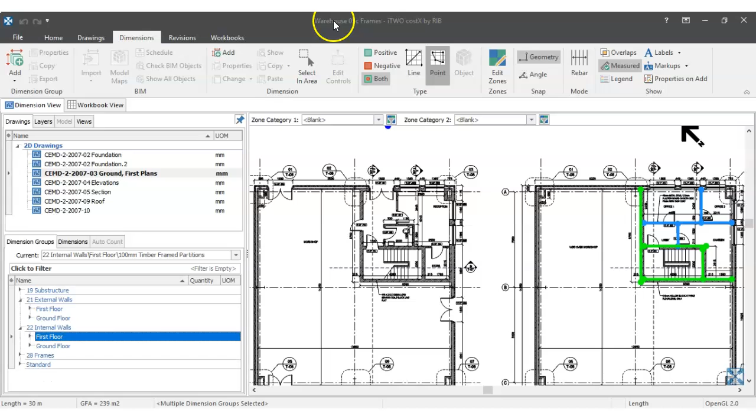Okay guys, welcome back. So starting off where we left off last time around, I will get to renaming this after I finish. I'm going to add a couple of things to my external walls and my internal walls, starting with the ring beam, or there's a beam in the corner here on the internal leaf.

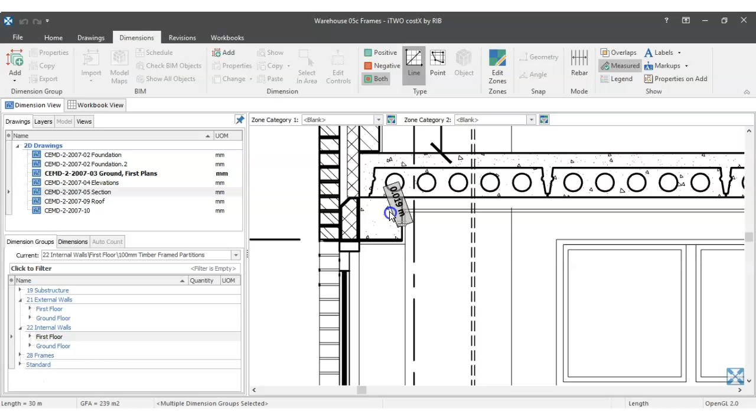So you'll see it in the section if you click section here. You see that beam there, you would have done this with FICRA. That's a 215 high by 215 wide beam on the internal leaf, just above the 215 wall. Same goes on and around the stair core, and then up along the side here, which you'll see in the plans. So those beams have to be measured.

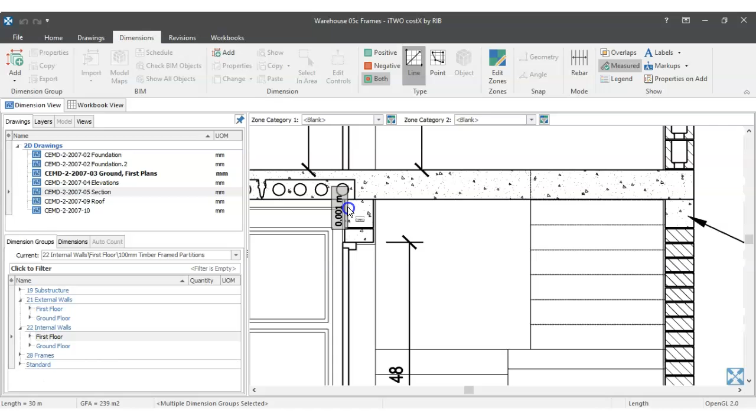What we're going to try and do is measure it in such a way that we measure the length, the volume, the weight of steel, of reinforcement in that beam, and the formwork. Now the formwork, just make a note, if it's a 215 by 215 in situ concrete beam, there'll be formwork on one side, which is the height, the other side, which is the height, and the bottom, which is the width. There will not be formwork on the top, because that's where we're pouring in our concrete. So you would have done this with FICRA.

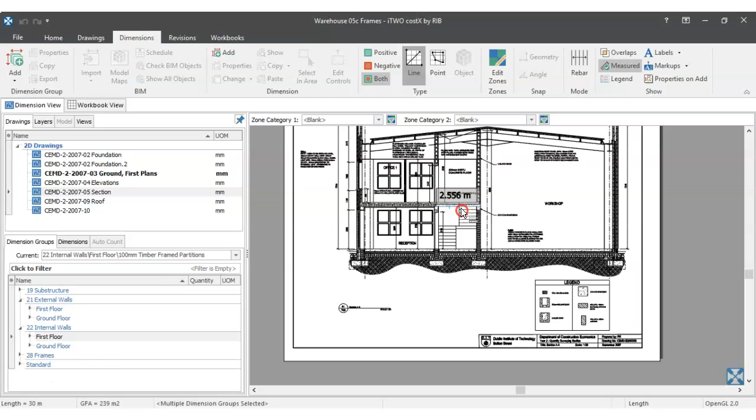So let's start with the external walls, and we can click on the external walls, click on the dimensions tab, click add. I'm not going to designate whether it's on the first floor or the ground floor, so we can just leave that blank, 21 external walls, and then just put in 215 times 215 millimeters in situ concrete beam. Okay, and it's in the external walls.

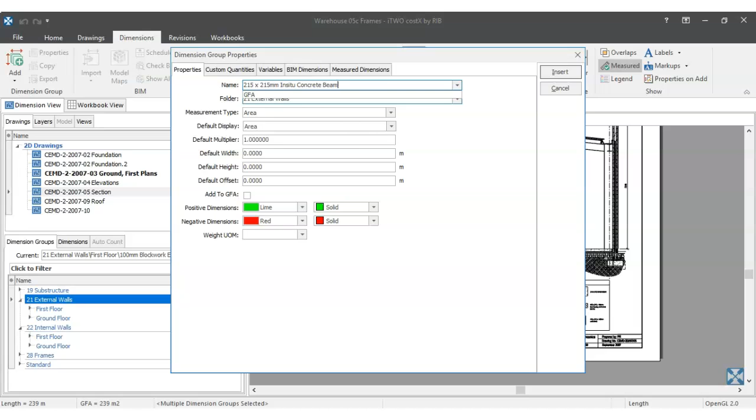I'm going to measure it as a length, and my width is 0.215 and my height is 0.215. The reason it's not 215 is because it's per meter. You can see the little M there. So I've got to convert the 215 millimeters to meters. The weight UOM, I want tons, not kg. Now I could take it in as kg and price it accordingly, but reinforcement steel is usually measured in tons, so let's leave it as tons.

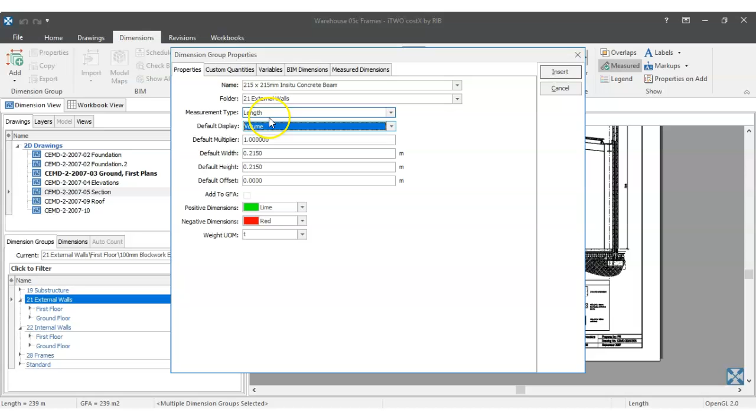I'm going to default display it as a volume, but make a note that I am measuring it as a length. Custom quantities, the next tab, I am going to add a custom quantity, and I have my volume, my weight, I want to add formwork. Now I could do this in the capital F formwork, in the workbook, by taking the length times the 3 sides, but why not put it in here as an automated measurement, meter squared drop down, so formwork meter squared.

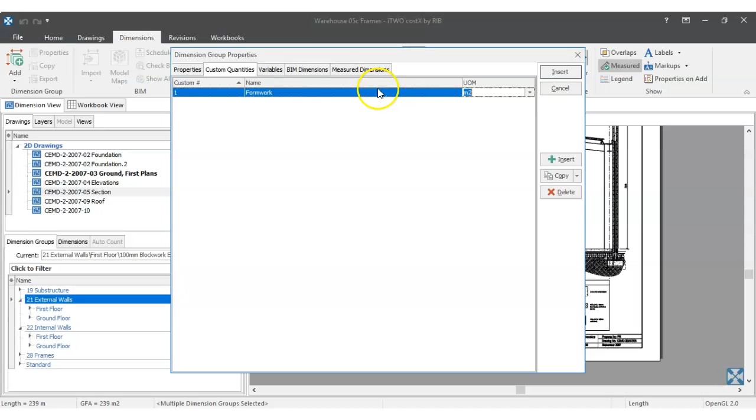Cross now into my measured dimensions, and there's a couple of different items I need to measure here. My volume is in there as the area times the height, and the area, of course, will be the length times the width. So obviously the volume is the length times the width times the height. I am going to measure a length, so that'll populate that. Actually my weight won't be my length. My weight will be my volume times 250.

I'm guessing that it's 250 kg per meter cubed concrete reinforcement. So every 1 meter cubed of concrete, I'm applying 250 kilograms of reinforcement. I don't have a rebar schedule at this stage, so this is just a guesstimate. It might be different than what you did with FICRA, but I can change it if I go back to FICRA's Excel files and see that it's completely different. But for the moment, let's use that rule of thumb for the beam.

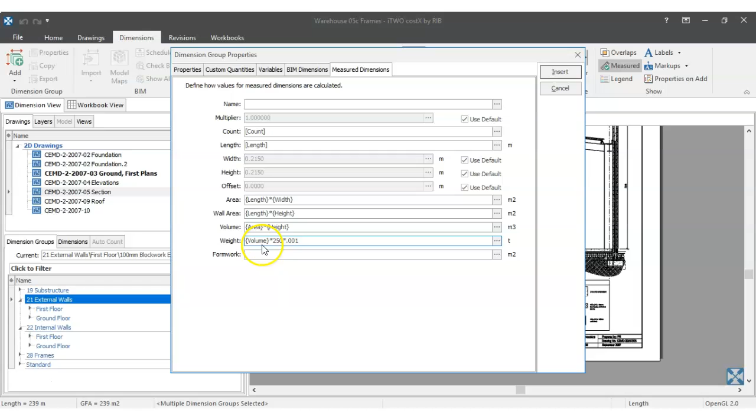Volume times 250. And why am I multiplying by 0.001? Well, that's my reinforcement conversion from kg to tons. I can divide it by 1,000 or multiply it by 0.001. So I'm happy enough with that. Close. So that's that formula, which will take the volume times 250 by 0.001. Now I could have typed that in rather than using these 3 dots, but it's handy to use the dots.

Formwork will be the length, which I calculate, times 3, because you've got 3 sides, times 0.215. Or instead of 215, you could put the width. So we've got length times 3 times 215, or width, which is 215. I might put in 215 because they're different widths and heights.

It's not width as such, it's the width and the height. So the 3 is basically the 3 sides, and what is the height or width of those 3 sides? It's 215, because it's a 215 by 215 in situ concrete beam.

So the length will be the total length multiplied by 3, multiplied by 215, will give me an area. I'm going to close that, and I should be happy enough with that. Click insert. So in that goes.

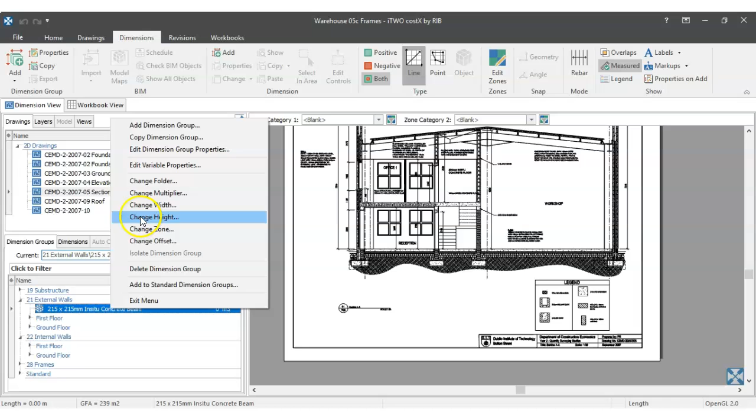Now I'm going to have the same in internal walls, so rather than do it all again, let's try and copy that dimension. Right click. Is there a copy dimension here? I haven't done it in a while. Copy dimension. This time I'm going to drop it down into my internal walls. Is my internal walls there? I might have to just type it in. 22 internal walls. Just get rid of that.

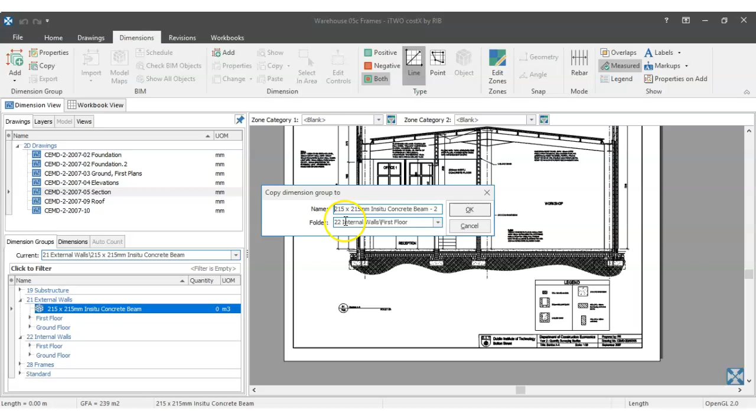Ooh. Oh, it won't let me delete it. It's fine. Leave it in first floor. It's okay, it doesn't really matter. I can change it. I might put a 2 there instead of a copy, and just make sure the name is correct. So I've just basically copied that dimension with all its properties. It's going to go in the first floor, but for some reason it won't let me delete that.

Click OK, and then I can double click into it and I can delete the first floor back to the dash, and everything else is okay. I could even change the color when I go back into it and click update. So there I've got two exact same measurements. By copying it, I didn't have to do the whole thing again with the formwork and the weight and width and the height, etc. It'll have all those properties in there because I've copied it.

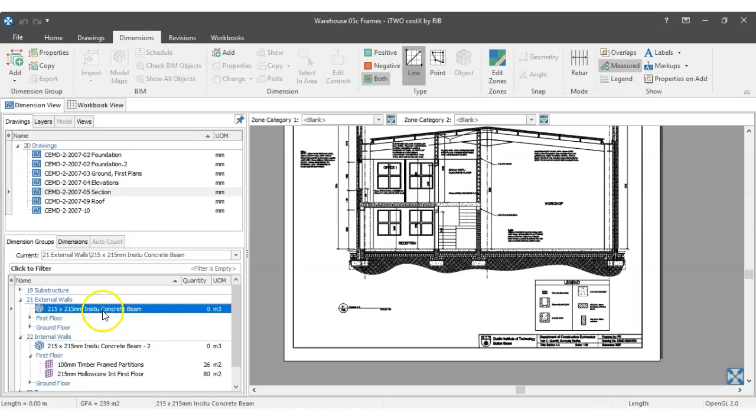So let's go and measure these concrete beams, starting with the ground floor. Measure it as point mode, dimensions. It starts right here because it starts on the 215 wall. And where does the 215 wall start? It starts here in this corner. So I believe it's from there to there. Now the reason I'm not bringing that all the way across is because I'm going to start right here. And if I bring it all the way across and then start again right here, I'm double measuring that corner.

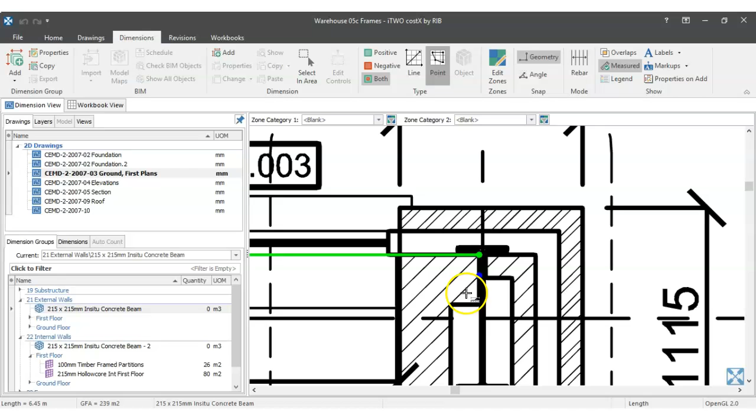Remember, because I'm measuring a line doesn't mean that line is on the edge. That line obviously represents 215 millimeters, so it's bringing it right to there. I could bring it through the middle, but I'm measuring edge to edge, so that's okay. But it does represent the thickness or width of that 215, so I've got to be careful not to over measure things by double measuring corners. This comes with a bit of practice, and you can see there I've measured the other length.

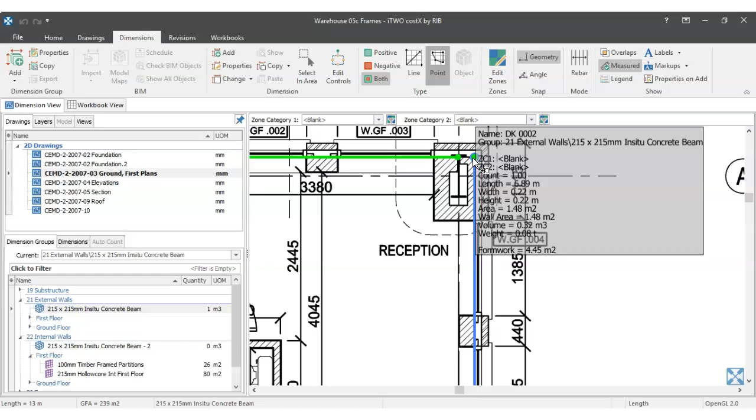Now I've measured through window opes, etc. In fact, that is the case because it's above those windows. And you'll notice I started on that edge. So what have I got there? 1 meter cubed, but you'll see that my volume is 0.62. I've got a formwork of 8.61. If I hover over, I've got a weight of 0.15 tons. So happy enough with that.

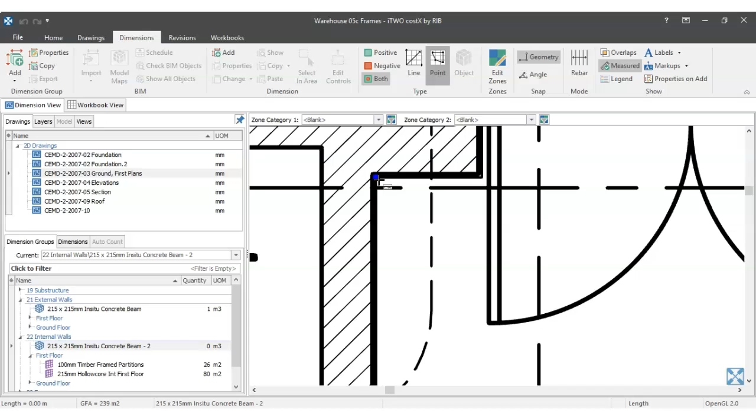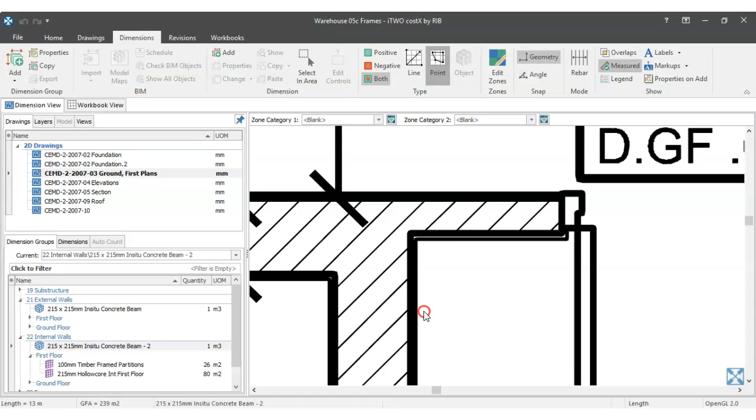Onto the in situ concrete beam. What's going on here? Well, I'm going to start right here at the corner. Why? Because I've measured across there as the external one. I'm going to come down to the edge. I'm going to click from there to there, stop there because I started my external one down here, and then moving on to here, I can go right the way to the top. Zoom in a bit more, and that will cover me up to there, and then start there and end there. So that should be enough there.

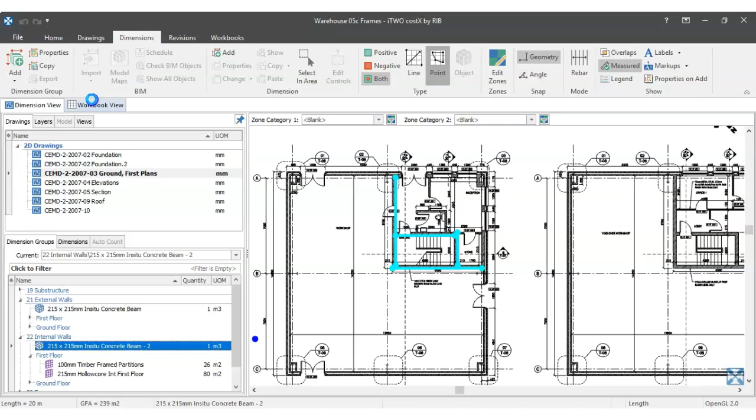Hover over that. I've got a volume of 0.9, a weight of 0.23, a formwork of a little bit more than I had on the previous. Okay, so I'm happy enough with that. That will give me all the dimensions I need to measure that in situ concrete beam in the BOQ. So realistically I only measured the length, but because I got all those attributes in terms of what I put in for width and height, formwork and reinforcement in terms of weight, they're measuring them all as secondary quantities, even though it's only shown as a volume. So you should be getting well used to that by now. CostX does something similar in relation to shapes, and I'm happy enough.

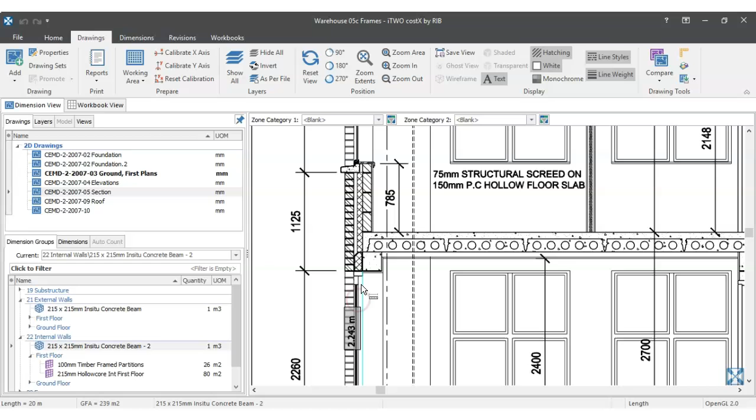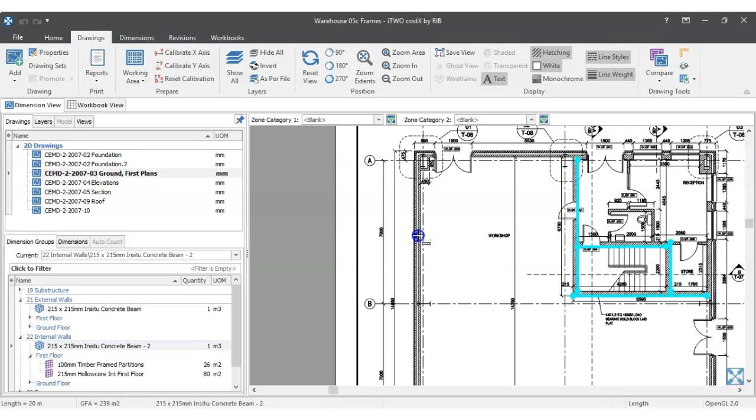The other thing I want to add is the forming cavities. So where are they? When I measured external walls, I measured individual external leaves, individual internal leaves. I didn't measure this forming cavities, which includes the insulation, up through that entire perimeter of my external wall. So in the ground floor, there's my cavity. And through the center line of that cavity, in terms of an area, total area around the building, I've got forming cavities of 100 mil.

So let's put it in. Click on external walls, add a dimension group into the external walls. You can leave it just as external walls because it's going to run the gamut in terms of ground floor and first floor up through both.

And I can just put in forming cavities. Now I can put in a full description, be it wall ties, insulation, etc. But I just need to represent what that is, so I know what I need to use in my workbook. I'm going to measure it as a length, and I'm going to default it as a wall area.

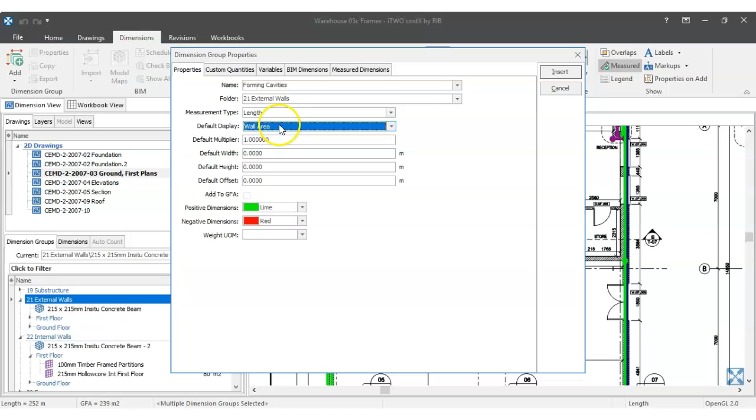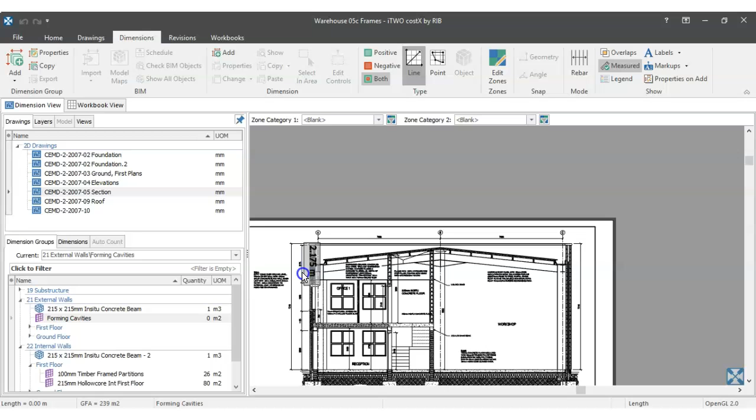Now, if I measure it as a length and want to default display it as a wall area, I need a default height. So what's the total height of my building? Well, I know it's 7.2, so I'm going to put that in, and I might use a different color, dark blue, click insert. So 7.2, I would have checked this before I measured it. That's the height of this dimension, that dimension, those 4 dimensions there.

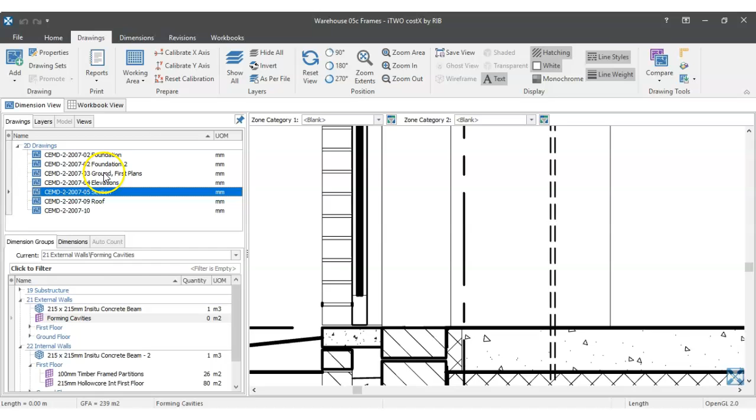Or you can click the little drawings scale ruler here, click, and it's down to my ground floor because anything below that is in the substructure. 7.2, bang on. Okay, so I'm happy enough with that. So I need to go ahead and measure it. Let's click back on my ground floor and make sure I'm on the quant. I am. I measure all these things usually in point mode.

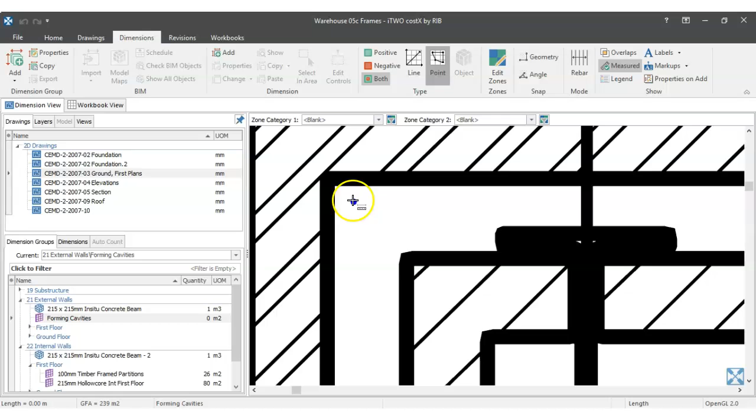This time around, I'm going to turn off my geometry. The geometry basically wants to snap onto a point or a line. I'm going to turn it off, and basically I can click wherever I want. I'm going to click on the middle of the first corner. Now after I've clicked it, I'm going to hold down control. This is important. Hold down control on my keyboard and keep holding it.

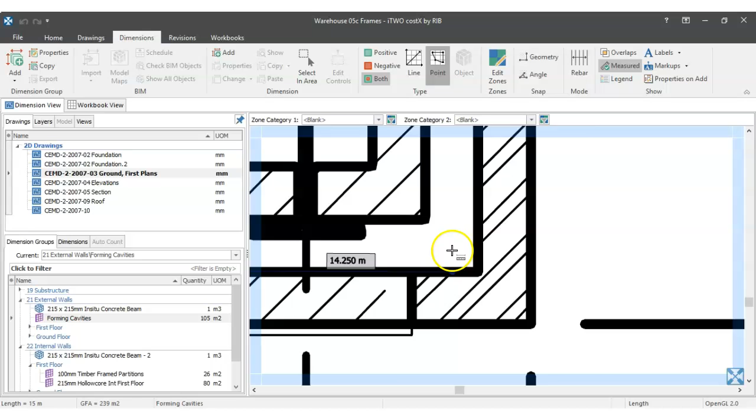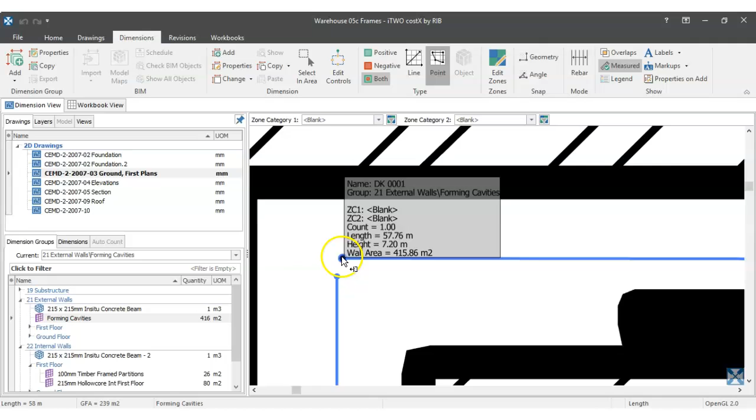And then go to my next corner. Okay, there it is. And then go to my next corner, what I think is the middle. Click. And then up to my second last one. And then across to click and release. Oh, that's jumped. Push back. There we go. So total length is, if I hover over it, 57.76.

Total wall area, because it's a continuous line. Now I could have measured them all as 4 separate lines. Click, click. Move on to the next one. Click, click, click. But I measured it as a continuous line by holding down control as I click around, and then click on the last one, release the control, and that's a continuous line.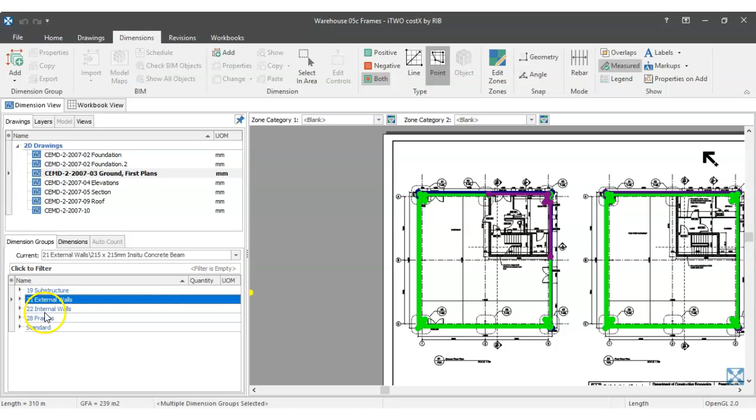To see your continuous line, click your dimensions, there it is. If you measure them as 4 lines, you have 4 individual measurements there. So the total area of my forming cavities is 416. So that is those few extra things in external walls and internal walls: my internal beams, and forming cavities, which is my insulation and wall ties. So I'm going to move on now to 32 external wall completions.

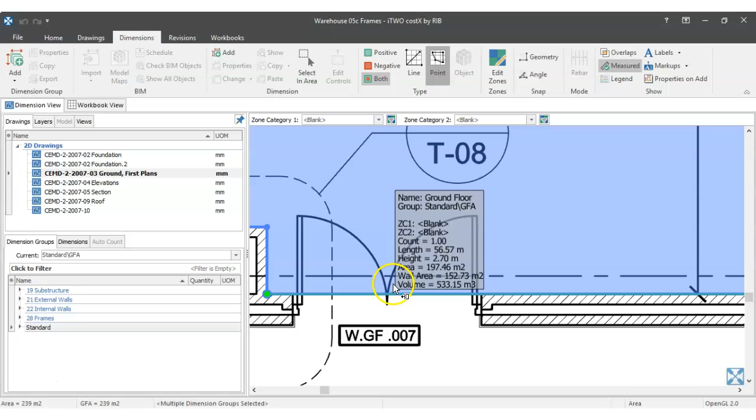Okay, looking at the windows, let's take a look at them on both the plans and elevations. There at least is the door, 1.8 wide. That's a steel door. There's also a steel door here to the warehouse, and I believe there's also a steel door in that elevation into the warehouse. This is a glazed double door here into the reception area. And then we've got some windows. I believe that all the glazed windows and doors are UPVC, and the double steel doors are steel doors.

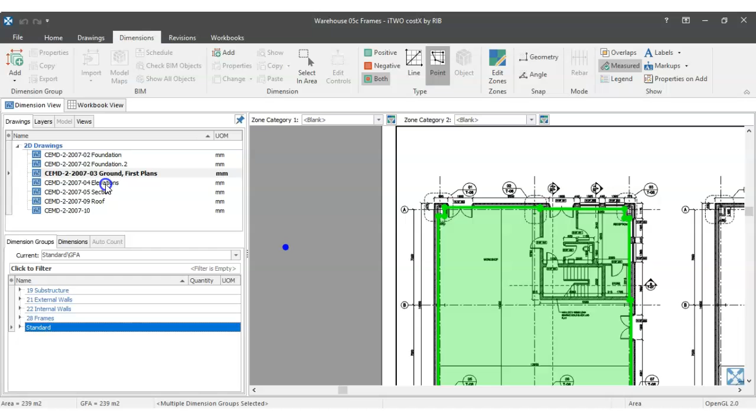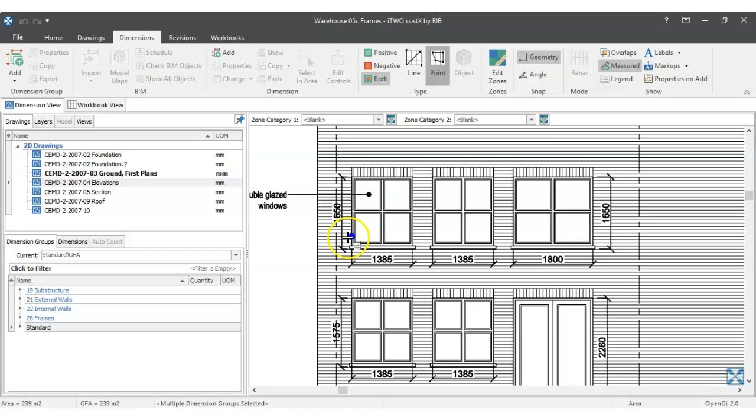So before we add them, looking at the elevations, we can see that the heights are on there. Now bear in mind that the height is from the bottom of the sill, so it would be the height of an opening, whereas when we're measuring the windows we need the actual height of the window. So what would be 1650 in height is actually 1575, because we're taking away the 75 millimeter sill there.

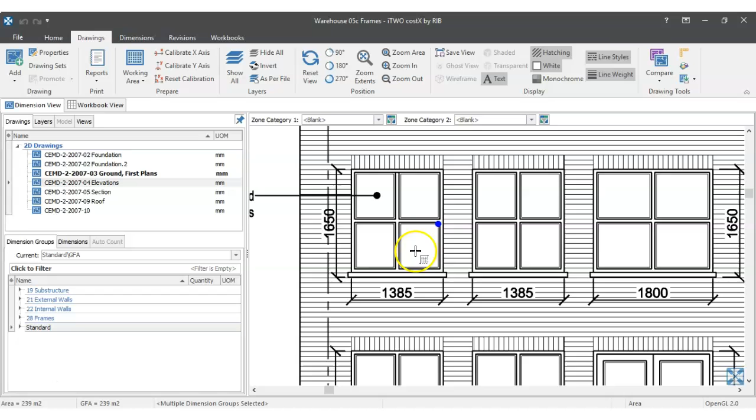So let's take a quick look at that. Drawings, our measurement ruler. If I just click the top and click the bottom, I can see that is 1.575. So from the heights there, which is 1650 on the first floor, I'm taking away that 75 millimeters. All the widths are okay because they're from edge to edge, and I need to put in dimensions for each one of these doors and windows. So let's go ahead and do that.

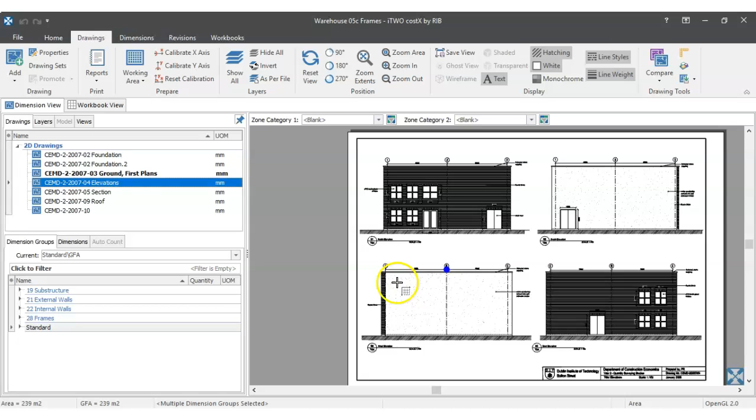Maybe leaving that elevation open. Click dimensions. You've done this so many times. Click add dimension group. It's not standard. Let's drop that down into, well, I have to create a new one, don't I? Into 32 External wall completions.

I'm going to do a little \, which is the key to the left of the shift key on the left hand side of the keyboard, not the right hand side. So external wall completions, a \ and then I'm going to put in UPVC glazed windows.

There we go. And my first one is 1385 millimeters by 1500. Those are the ones on the bottom floor. If you want to check the dimensions, go ahead, but I'm happy enough with that. I'm going to measure this as a count. Default display as count is fine.

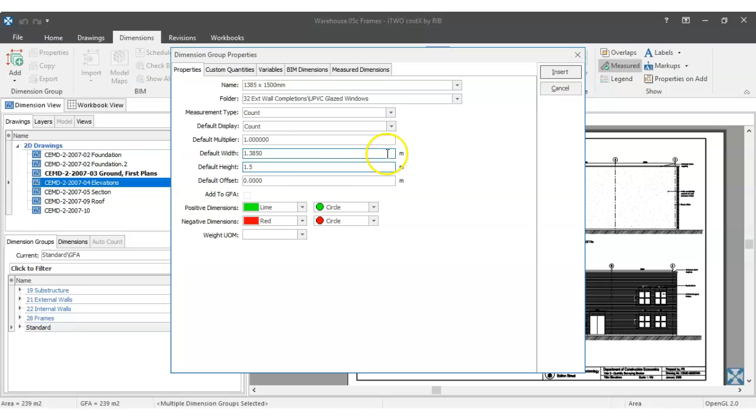Default width, well, let's put in the widths here. Now I could do this in the workbook, I don't necessarily need to do it here, but let's put it in here. So that 1.385 times a height of 1.5, and remember it's in meters, so I do need to change them from millimeters to meters when I'm putting them in here. 1.385, 1.5, is that what we got here?

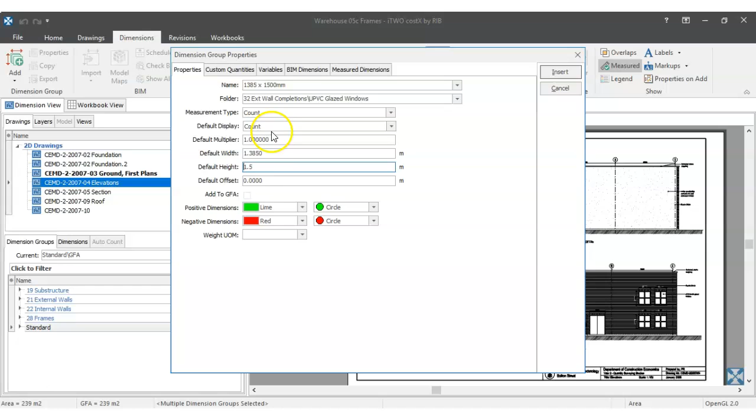It is. And then I suppose the width times the height will give me a wall area, which will be utilized as the area of the windows when I'm deducting them out of the wall areas. So that will be handy, so it's worth putting that in there to use quite quickly, even though I'm registering them as counts. Leave it as lime green, that's fine. Click insert, that's that one.

Click another one, and add another window of a certain size. Let's add 1385 by 1575, and these are the ones that are on the first floor. That's all fine there. Count, and then down here I've got the same width, 1.385, but I've got a different height, 1.575. Okay. Color, let's put in a different color here. Doesn't really matter if you do or don't, but just make sure everything's okay. There it is. Click insert.

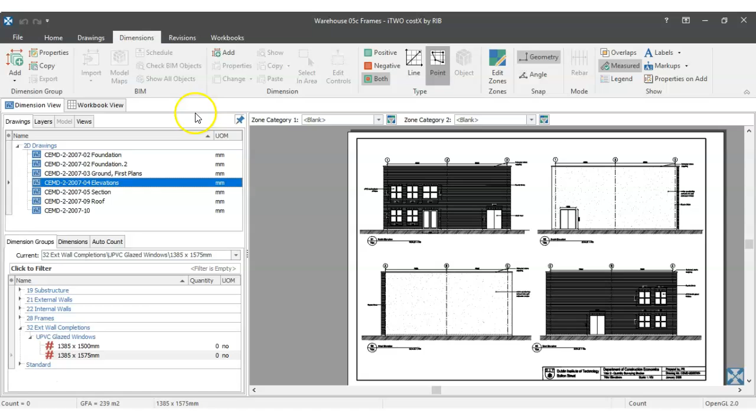I believe I've got a third window type. I'm measuring them per size of the window, and that's usually what you do in a bill of quantities. It's a composite item per size enumerated. So why not just keep that process here? 1800 multiplied by 1575 millimeters. That's the height. So width times height. Count. Give it a different color. Doesn't really matter. Dark blue in this case.

1.8 in terms of the width. Where am I getting the 1.8? Obviously it's from there. And then the 1.575 is my height. That goes in there. I'm happy enough with that. So that's my third window. The other thing I want to measure here is doors. In fact, before I measure doors, actually I can go ahead and measure doors here.

Also UPVC, but this time I'm going to put in doors at the end to give a separate subgroup, and then put in the size of that one door, and I believe it's 1800 multiplied by 2260 high. How do I know that? Well, I can go back and look at the elevations if need be, but I remember. Count, and then again put in the 1.8, and then put in the 2.26.

Okay, and again, if I want to change my color, that's fine. In this case, orange. 2.26, 1.8. I always double check. Click insert. I should get a separate subgroup there, glazed doors, as a number. And then my last item is the steel doors. So let's go ahead and do that. Add dimension group.

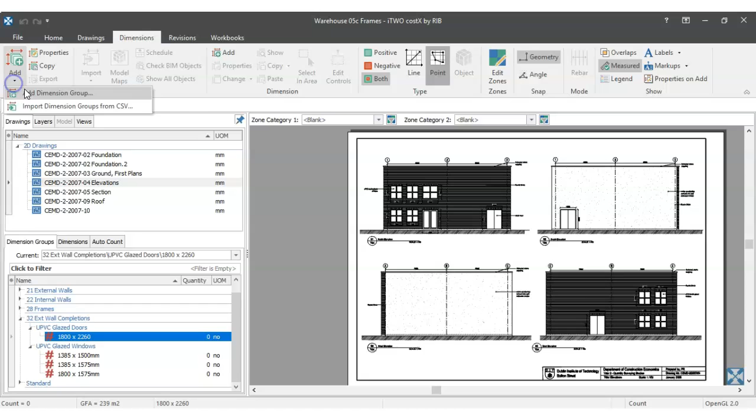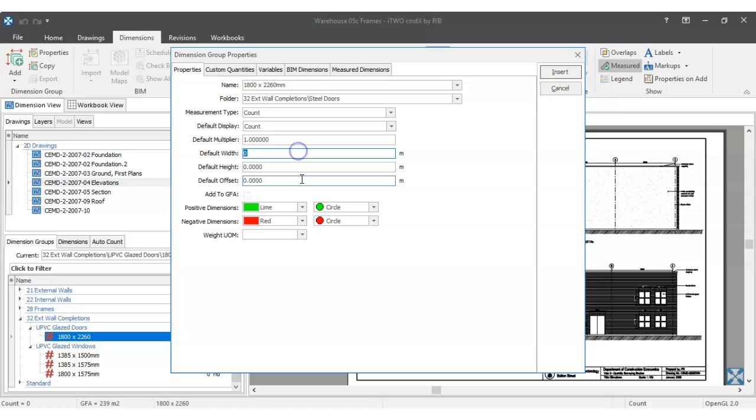Just change the UPVC to steel doors. What was the last measurement there? And the steel doors are the same, 1800 multiplied by 2260 millimeters. Also a count. Width, same again, 1.8, and height 2.26. So very happy with that now in terms of how that's worked out. Well, not very happy, but happy enough. Purple, and click insert. So there we have our doors and windows.

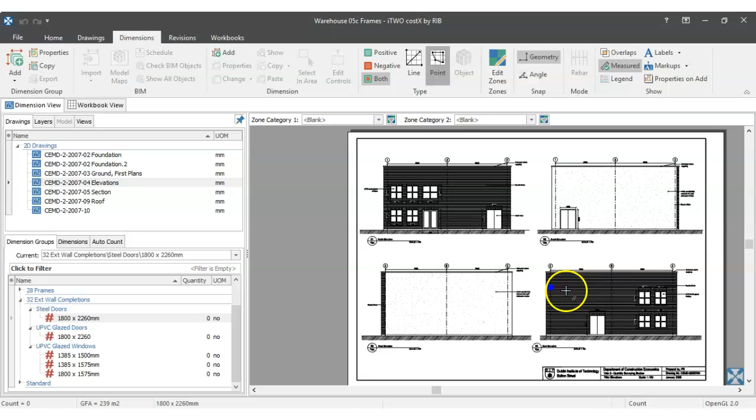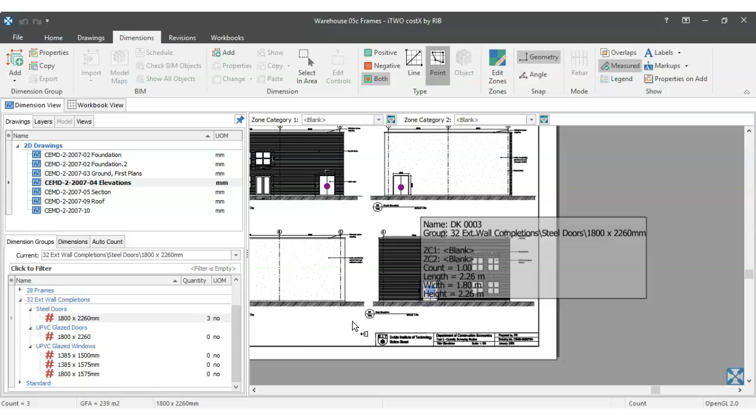So starting with the steel doors, why not measure them off the elevations because they're open here? I could measure them off the plans. Usually most of the things you measure are off the plans in on-screen measurement, but one thing you can certainly do here is measure off the elevations. So the steel doors, there's one, doesn't matter where I register them, two, and then there's a third right there. So there's my steel doors. And my glazed doors, there we go. It's that one there. Click, just register my count in the middle.

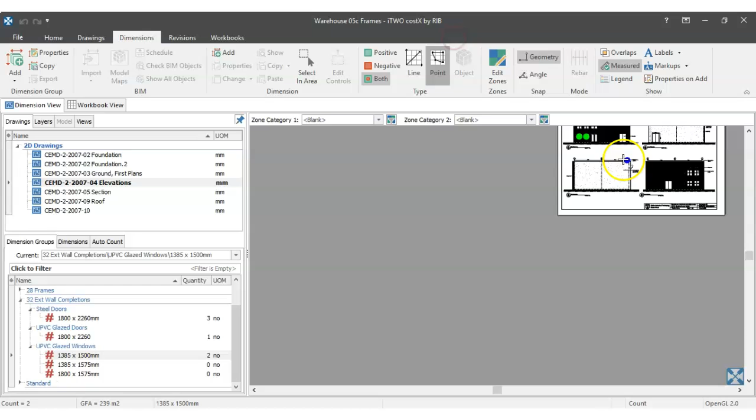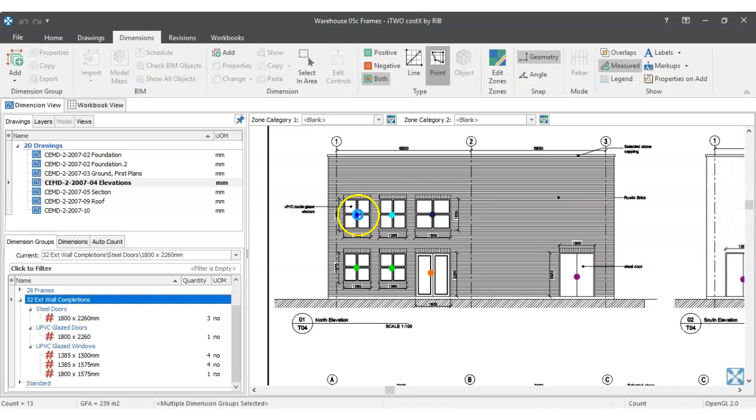So we got the 1385 by 1500. I believe that's the smaller ones on the bottom here. It's the 1575 minus the 75. Yep, 1, 2 on that elevation, and then 2 on this elevation. Okay, that counts those ones. Then the next one is the upper ones on the first floor, those window sizes, and then the last one is that. So in terms of external wall completions, I can click the folder just to make sure everything's measured. It is. I've got a color count everywhere I need it, and I believe that is it.

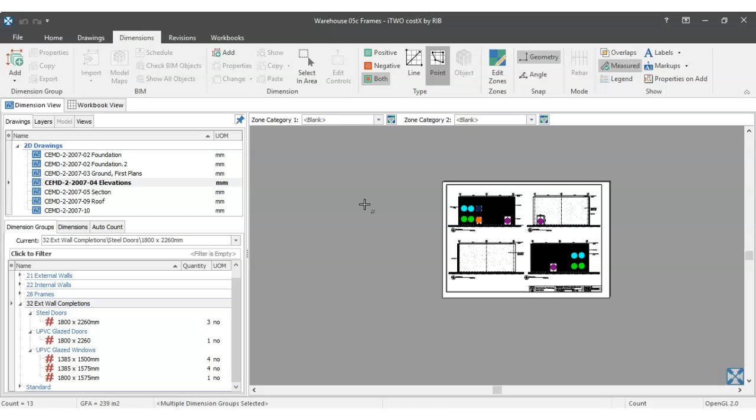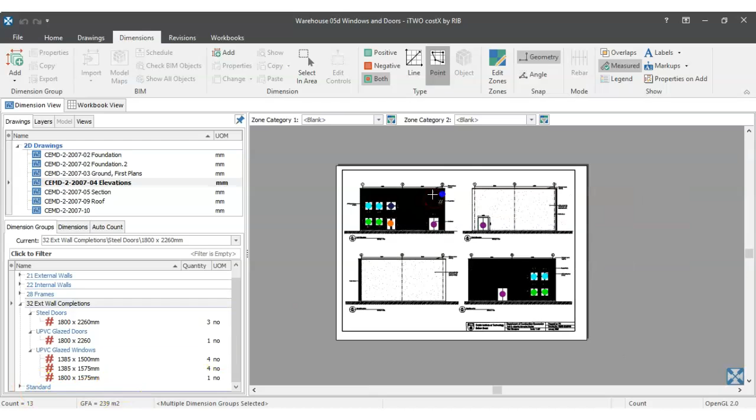Now what we're going to do is just do one last thing, because that is our measurement. We will use those measurements in our workbook next week. But for the moment, that's all I need to do. And I'm going to change the name of this in Properties in the File tab, and just put in 05d, and then Windows and Doors. That's pretty much what it is. Windows and Doors, and click Update. So that is, I suppose, my next tutorial. It's 20 odd minutes, so quick enough one, and we'll pick up where we left off on that next week.